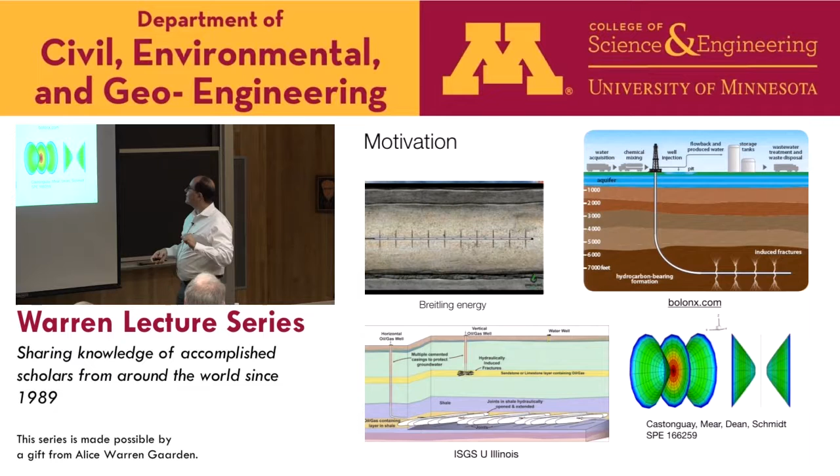And it seems that in science you really have unanswered questions and unquestioned answers. And so this idea that you will naturally have these nice networks of parallel cracks, to me, falls into the second category, to such an extent that it's often also an assumption that is made in lots of models. So this is just one random example of numerical literature where the rotational symmetry was a de facto hypothesis in the computation, because everything is symmetric, therefore we're going to have a symmetric solution, and everything is going to be nice like that.

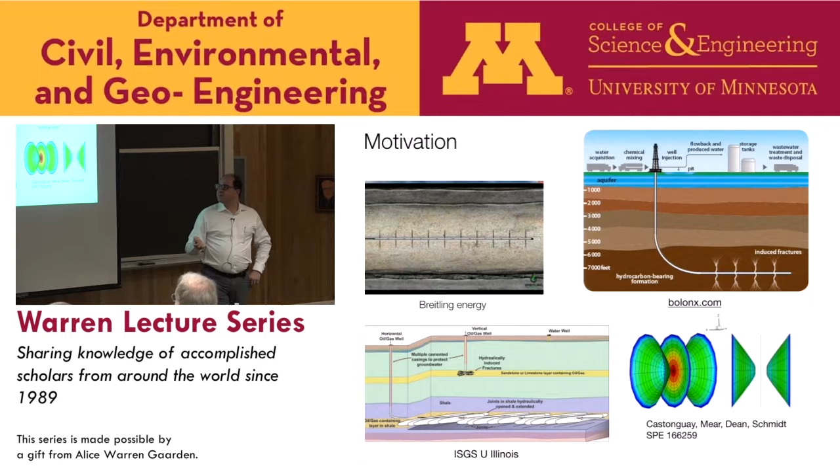On the other hand, in my experience doing fracture mechanics in situations when you have many cracks that interact with each other, we've highlighted several situations in which the interaction between cracks causes loss of symmetry. And so, to me, this picture has always sounded very idealized and maybe closer to wishful thinking than reality.

So, in short, what are we looking at? We're looking at the tightly coupled problem of hydraulic fracturing, so injecting a fluid through a well into a porous reservoir. And so what I want is to develop the model. I want to implement it with as few assumptions as possible, and in particular, as few assumptions as to the geometry of the resulting cracks as possible. And what I'd like to use this for is to study the interaction between stimulated cracks.

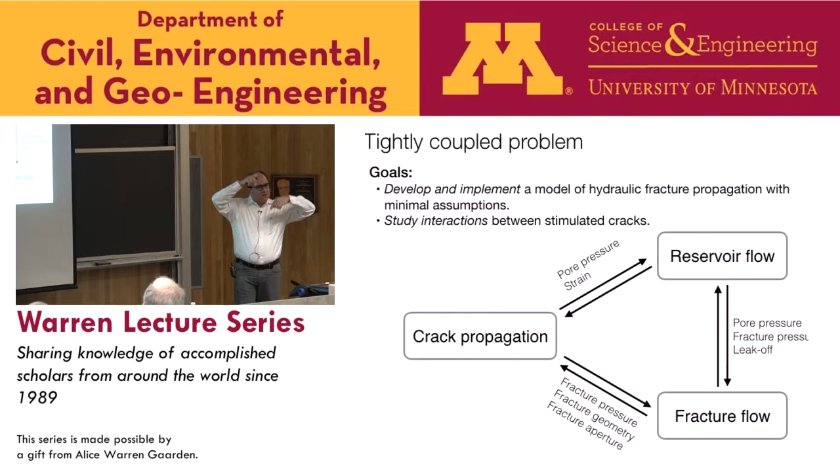So schematically, why is this an interesting problem? Because you really have these three tightly coupled components. You have the flow in the reservoir, you have the flow in the fracture, and the intercommunication between these two is the pore pressure and the fracture pressure, and the balance law, the leak off, so the mass balance between the fracture and the reservoir. You have the crack propagation that interfaces with the reservoir flow, because the pore pressure, of course, affects the crack geometry, but also the strain in the reservoir will have an impact on the reservoir flow.

And the crack propagation, of course, interacts with the fracture flow, because the domain in which the flow in the fracture takes place is a direct consequence of the propagation, but also the aperture of the crack, which is given by the geomechanics, will have an impact on the effective permeability of the fracture system. So you have these three models that we need to couple in a tight manner.

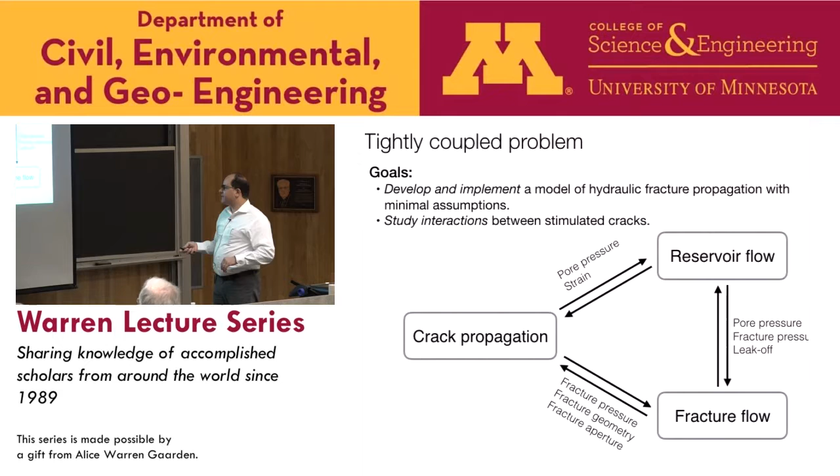Okay. So before I go into the core of the problem, it's also interesting to look at the scale, time, and space involved, because that's what's going to dictate some of the modeling hypotheses. So bear in mind that I'm a mathematician, so I'm not very good with units. So I had to seek help from colleagues in engineering and industry. So I think I got it right.

But so we look at the reservoir, so the scale of the reservoir, or the target zone of interest in the reservoir, would be maybe a few meters to maybe up to a kilometer. And the permeability, so tight oil is 10 to the negative 18. I don't remember the correspondence in millidarcy, but I think this is correct, compared to a more classical reservoir.

When I say time scale, what I mean is if you stop any change in the external condition, how long will it take to reach equilibrium? So typically on a classical reservoir, it's going to be of the order of a few days. As far as I understand, in the shale business, the time to reach back fluid equilibrium could be up to 10 to 50 years. So that would be 100,000 to a billion seconds.

And so I'm not going to try to look at multi-phase transport. I'm only going to assume that you have a single phase or a single fluid in the reservoir. And so at this time scale at which hydraulic fracturing takes place, it seems to make sense to assume that you have a single phase transient Darcy flow.

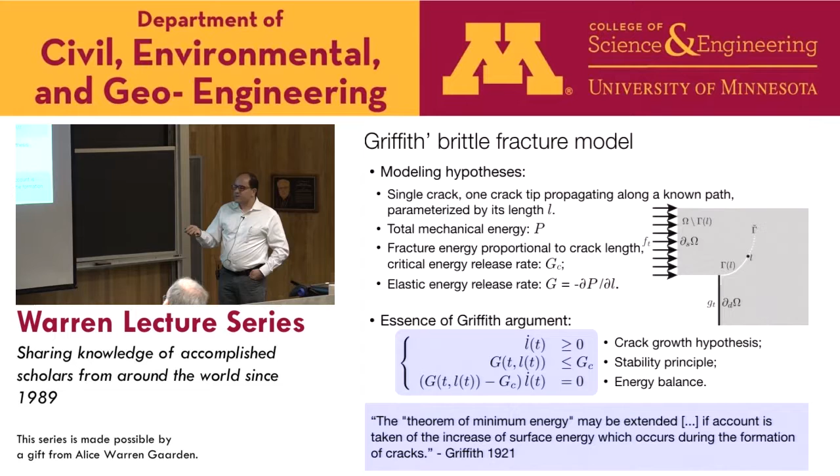However, it seems very simple because if you're familiar with optimization, when you look at these three conditions, these really look like KKT conditions for a constrained minimization problem. So this looks like minimization of P plus GC L under the constraint that L has to be positive. And indeed, if you introduce a total energy, this is your mechanical energy, so it's a sum of the elastic energy computed over the domain minus the crack, because if U is a displacement, the strain is singular along the crack set where the displacement becomes discontinuous. So your total energy is the sum of the mechanical energy in the domain minus the crack plus the work of external forces plus GC times the crack length.

And so one way to see this system of three equations is just as finding a pair displacement and crack length that satisfies the crack growth hypothesis, and that satisfies, so I wrote it as unilateral stationarity, that is, that the derivative of this quantity with respect to L is 0, modulo the crack growth hypothesis, and with respect to U is 0. So derivative with respect to U is just static equilibrium for a given crack length. And derivative with respect to L equals 0, at least positive because of the constraint, is just the stability equation and the energy balance.

So this is just a formal mathematical reinterpretation of this system of three equations. Griffith's crack growth, stability, energy balance is the same as a series of minimizations of this energy with respect to U and L under the constraint that L has to increase with time.

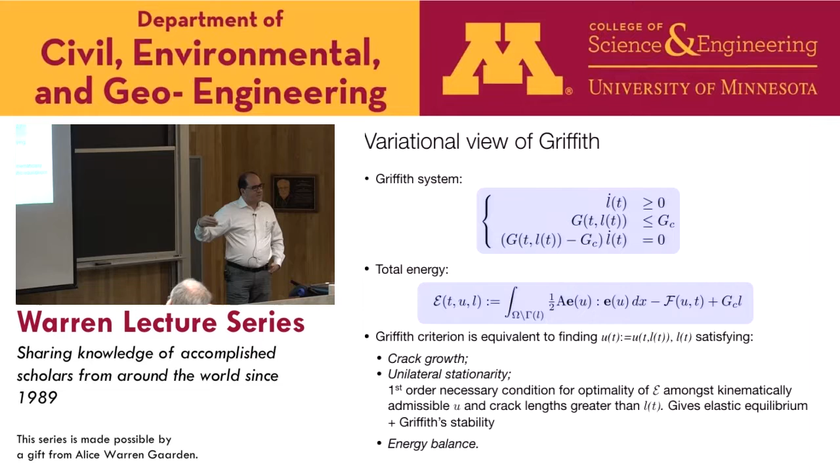Okay. So the next step comes from Gilles Francfort and Jean-Jacques Marigo in France in the late 90s. And what they suggested is that we could make a leap of faith: instead of assuming that your crack path is prescribed and using this energetic argument on a given path, which requires that you have another way to find the crack path, we could actually extend the search scope not only to finding just the length of a crack over a given path, but to finding the crack geometry itself.

So if you go back to this energy, mechanical minus work plus a term that is proportional to the crack length, what they propose is for any time or loading parameter T, any displacement U and any crack geometry gamma that is kinematically compatible with U, to define an energy that is the sum of the mechanical energy away from the crack, plus or minus the work of the external force, plus this term, where H n minus 1 is just mathematical mumbo jumbo for the aggregate length of gamma in 2D and the aggregate surface of gamma in 3D. So it's essentially the same thing as Griffith's energy, but extended to account for any crack geometry instead of just looking at the length of a crack along a known path.

And so they postulated an evolution now, saying that we're going to find U and gamma that satisfy exactly the same problem as before, that is the crack growth, unilateral stability, and energy balance. Okay. Or in other words, that we're going to do successive minimization of this total energy for gamma that contains all previous gammas and all U that are kinematically admissible displacements.

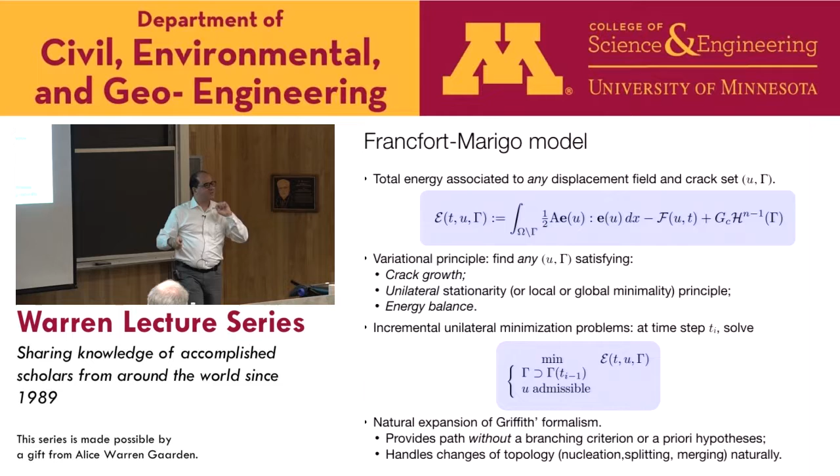In New York, or in any city with a grid plan, if you want to go between 2 points that are not along the grid line, you're going to do that by following this checkerboard pattern. But the length of your path is never the same as the as-the-bird-flies distance, no matter how small your grid is. So you can approximate the location of your optimal path, but you never approximate the length of your optimal path.

So again, the solution of that was independently derived in the math community, in the mechanics community, and the physics community. So being a mathematician, I will present the math version of that. In the math community, Luigi Ambrosio and Vincenzo Tortorelli in the early 90s were interested in an image processing problem called the Mumford-Shah problem. And the structure is very similar to that of the fracture problem. So I took off the work of the external forces just to make the equation a bit more compact. So here you have your variational fracture energy, sum of mechanical energy plus the surface energy.

So what Ambrosio and Tortorelli proposed is to introduce an epsilon, a small regularization parameter, so it has the dimension of a length. To introduce a secondary variable v that will represent in some sense, and I'll try to explain how in a couple of slides, the cracks. And so they introduced two additional functions, s and capital V. So in some sense, think of v as a function that lives between 0 and 1. V equal 1 corresponds to no crack. And transitions from 1 to 0 are where the cracks lie.

So think of a diffuse interface version of fracture mechanics. So S is some kind of a stiffness interpolation. When V is equal to 0, you want your S to be 0. When V is equal to 1, your S is equal to 1, so that in the region where V is equal to 1, this term is exactly the same as that.

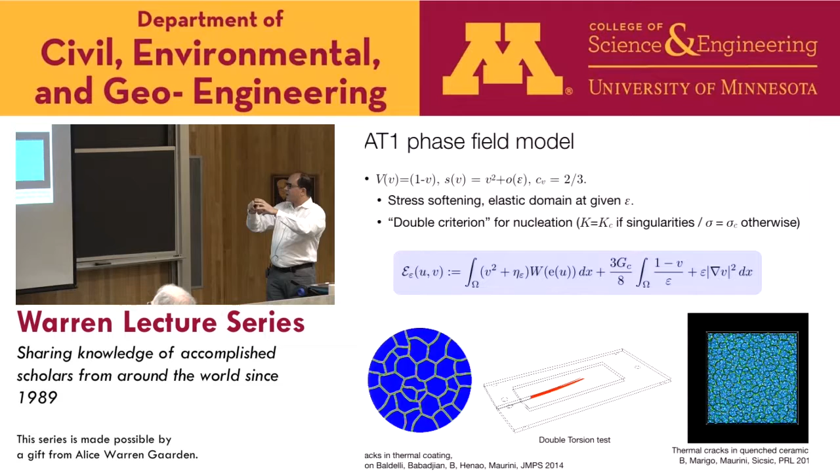This one is very hard to read on such small scale, but it's a propagation of thermal cracks in a ceramic. So think of a block of heated ceramic that you quench, or you put on the cold surface, and so you have this cold front that propagates. It creates tensile stresses and it creates cracks. And so here you're sitting inside your material and you're watching the crack front coming towards you. But you see the potential of this approach to see this very complicated crack pattern and the nucleation of all these cracks and the coarsening phenomenon that leads to larger and larger cells coming towards you.

Okay. So what we want to do now is apply this formalism to a Biot poroelasticity system, recover some concept of crack location from the V field, use the V field to formulate the coupled flow in the reservoir, flow in the fracture problem, couple them, and then get some science. So we're almost done, technically. So first is how do we do the poroelastic medium? We're going to assume that we're in a drained poroelastic regime.

And then there is lots of discussion as to what your stiffness interpolation should look like, what your S of V should look like. So our approach is to assume that you can think of V in some sense as a damage variable. And the mechanics community very much thinks of 1 minus V as some kind of thermodynamic damage variable. So our belief is that we should look at damage taking place at the sub-pore scale.

The reason for that is that we would very much like to be able to simulate the fact that you can create a crack just by increasing the pore pressure, essentially destroying or at least causing distributed damage by just increasing the pore pressure in your material. So that means that we want to apply the V field not to the effective stress, but to the Cauchy stress. So that leads to this somewhat unusual form of the dissipation potential.

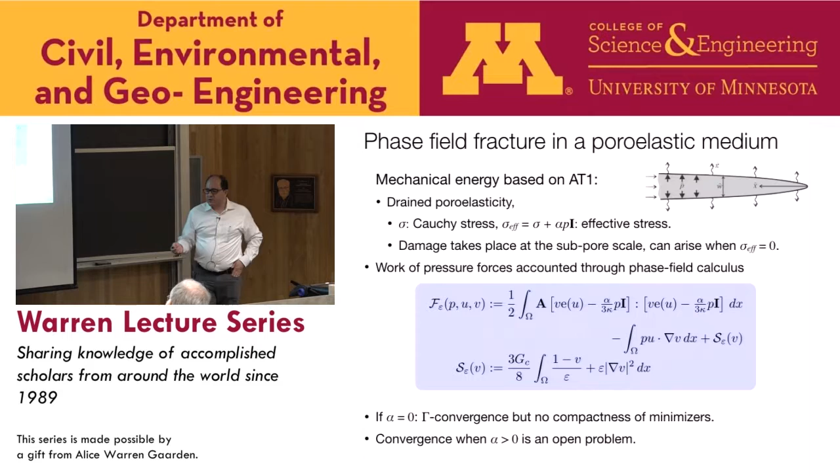And as a matter of fact, at least in the case where alpha is equal to 0, we can still show the gamma convergence. We cannot show the compactness of minimizers. It looks very technical, but it has a very strong implication. It means that we cannot show that the minimizer of this energy converges to the minimizer of the variational fracture energy. And we'll see why it will really hit us in the next slide or two. In the general case, we don't know how to do the convergence, at least the math community has not looked at that closely enough.

Okay, so I'm going to try to do a little bit of verification. I'm going to apply that to the Sneddon problem. The Sneddon problem: we're looking at a single crack that is filled with a liquid with no viscosity. We assume that there's no leak-off, there's no pore pressure. So really, the fluid flow is defined by one parameter, that is the pressure.

It's a nice problem because you can solve it in closed form, and you can see that if you look at just a line crack in 2D in an infinite medium, if you look at the pressure increment, then nothing happens until a critical pressure. And at this critical pressure, the problem becomes unstable in the sense of Griffith, that you cannot control the crack tip location. Your crack tip shoots to infinity. So it's not very interesting.

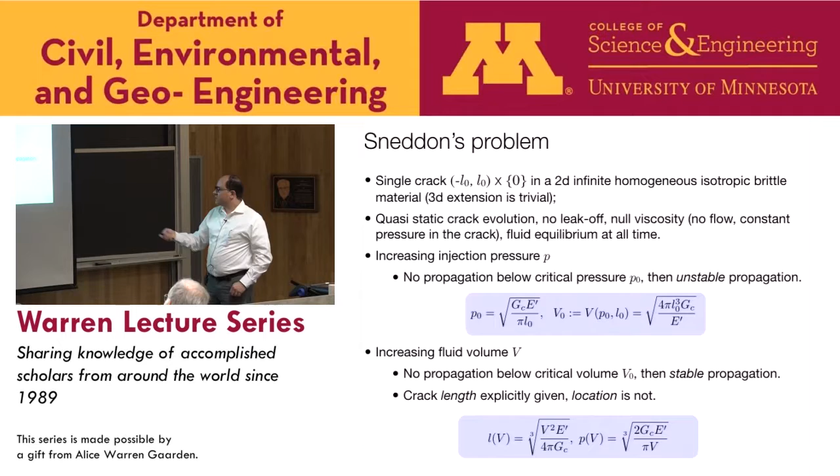If you look at the dual problem, that is minimizing with respect to the total fluid volume in the fracture, what you get is that until the volume reaches the critical volume associated to the critical pressure, nothing happens. And then you have a stable propagation. You can compute the length of the crack and the pressure in the crack through this expression that's well known. And so these are two computations. This is the crack pressure and the crack length as a function of the injected volume.

The dashed line is the closed form solution, the Sneddon solution. These series of lines correspond to various values of the regularization length. And what you observe is when the regularization length becomes smaller, you get closer and closer to Sneddon's closed form solution. If it becomes small compared to the mesh size, here the mesh is fixed, then you tend to overshoot on your pressure. So at least we know how h and epsilon should relate, and we have good faith that both coincide.

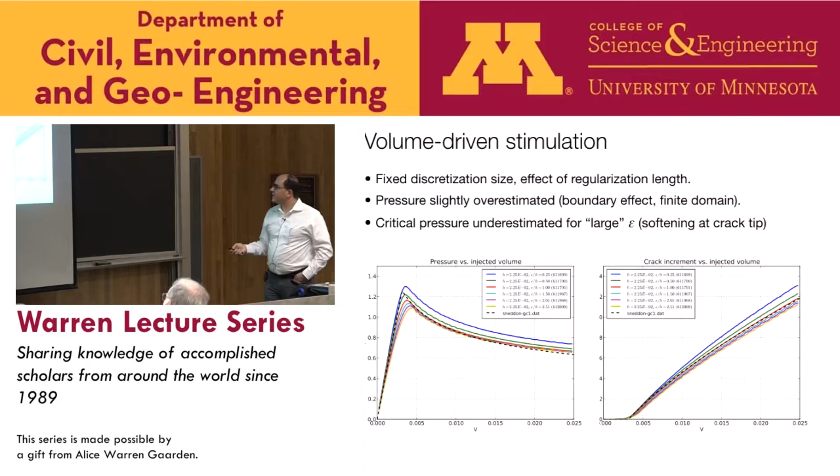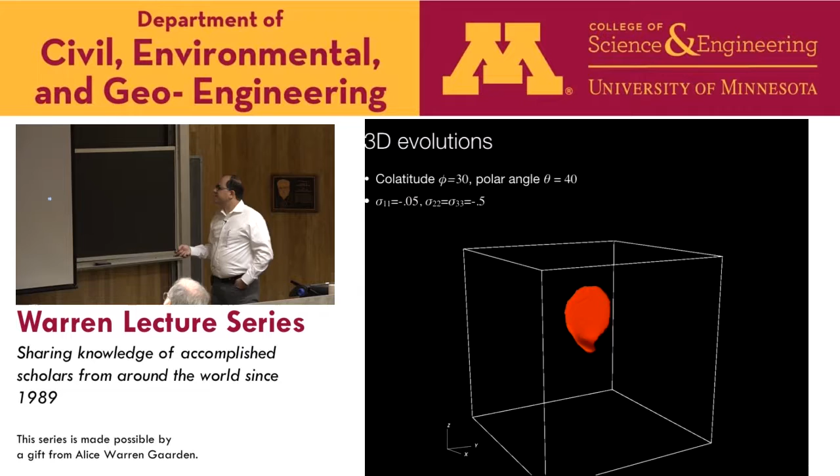So okay, it's an application to two stimulated cracks. It's just to show you that indeed we can recover crack paths. Indeed we can do merging, at least from the mechanics standpoint with this setting. I'll skip the 3D geometry. You can apply exactly the same formalism in 3D. You can get interesting fracture patterns. And instead, I'll go now to coupling with the phase field.

Let's look at the flow problem. Really, we have two problems. We have transient Darcy flow in a reservoir, and we have a steady state Reynolds-Poiseuille flow in the fracture. So the problem is driven by the mass balance, Darcy law, the boundary condition on the boundary of the reservoir. In the fracture, your mass balance, your Poiseuille law, and so the important quantity is the crack aperture, the normal jump of the displacement.

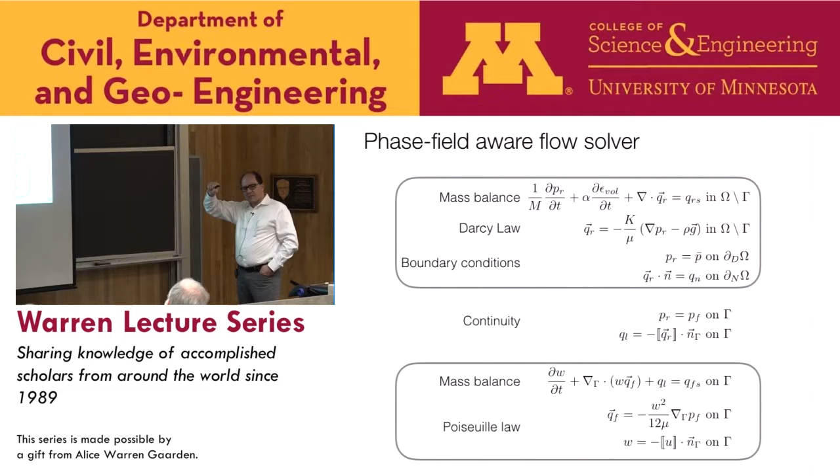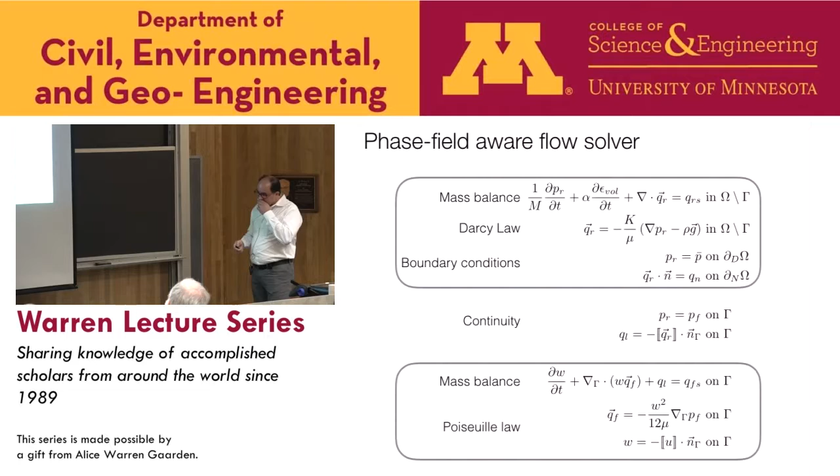And these two problems are coupled by the continuity of the pressure and of the leak-off of the flow from the reservoir into the fracture. So I think it's fairly classical that one way you can couple these two problems, you can just write them in weak form.

You take the proper finite element shape function, and you can get a weak form like that, where you have some equations that are on the reservoir minus the crack, and some equations that are on the crack. And of course, again, because we don't have the crack in the phase field problem, we don't have an explicit representation of gamma, we need to find a way to compute this integral.

And so this takes a little bit of work, and you use what we loosely call phase field calculus. This part is easy. So we want to integrate away from the crack. We know that the cracks are the zone where v is not 1, where v goes to 0. So we just multiply it by v squared. So here we're done, and we've recovered our integrals away from the crack.

For this, again, you try to see how you can recover surface integral from the shape of v. The v field is something that is not 1 near the crack, or the gradient is also concentrated near the crack. So by just hitting this term by, for instance, modulus of gradient v, or 1 minus v over epsilon, that would be about the same thing, you would get the integral. You can convert this surface integral into a volume integral.

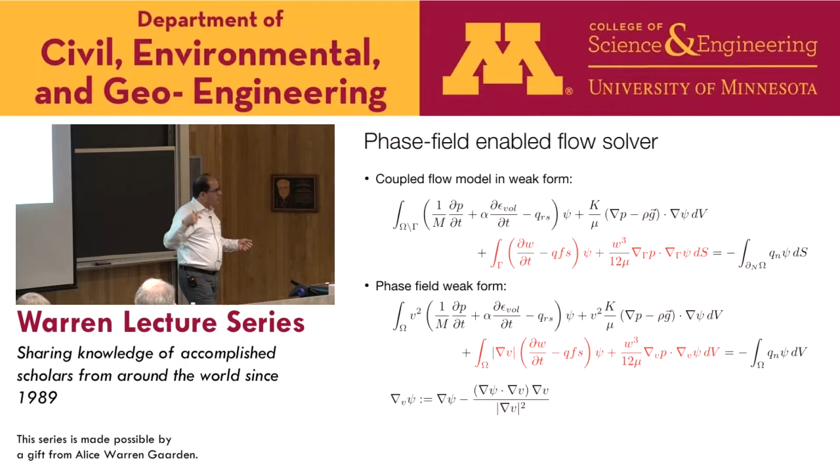Okay, so a few words on the implementation. For several reasons, we started by looking at how we could do just an iterative coupling of a mechanical solver and a flow solver. And it's a natural thing to do because maybe you have an existing flow solver and what you want to do is just modify it a little bit to make it aware of this phase field and then try to couple your two codes. So that would be the equivalent of the fixed stress coupling.

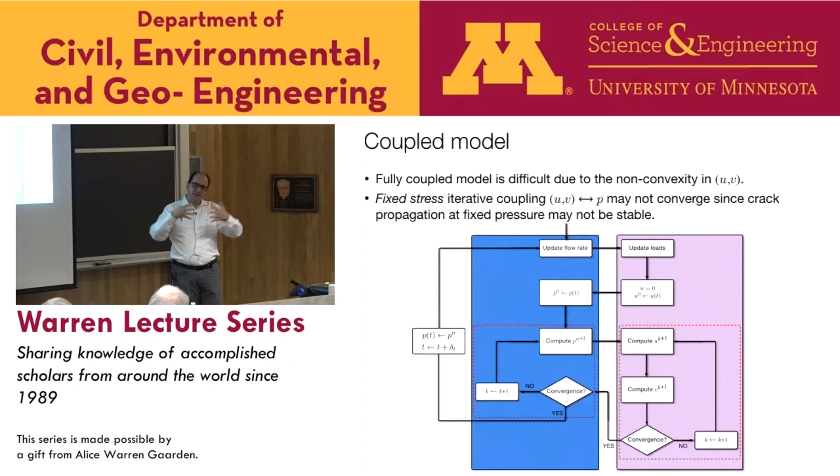If you're familiar with poroelasticity, it's very common, if you don't want to do a tight coupling, to do an iterative coupling where you compute the deformation, you get the stress in the reservoir. You plug that into the flow problem, you solve for the pressure, and you iterate back and forth, and you can show that this converges. So it seems like a very natural idea to do that. And indeed, many groups that try to do phase field coupled modeling use this type of coupling. It has just one caveat: it does not work.

And the reason is actually why I presented the Sneddon problem. Of course it does not work, because we know that if we fix the pressure, even in this really simple problem of the Sneddon crack, you compute a fracture pressure, and then you try to compute the equilibrium displacement plus crack. There is no such thing as the displacement plus fracture equilibrium.

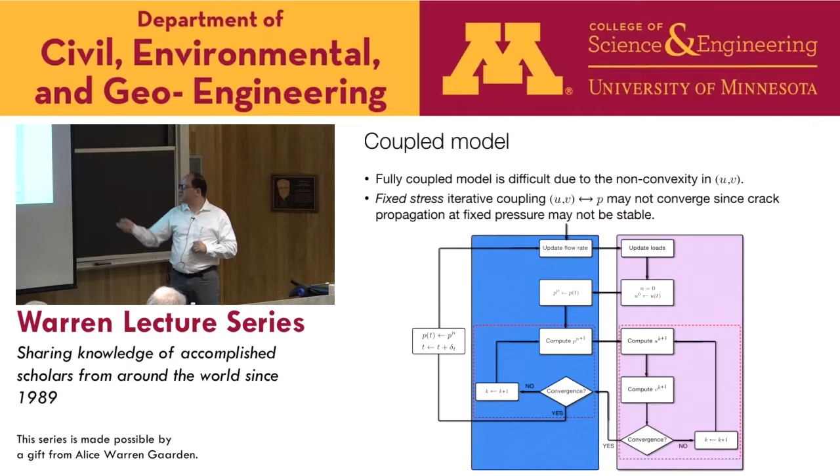So formally, if you want to prove convergence of an iterative coupling, you need some kind of a contraction map. You need to show that a small change in pressure leads to a small change in displacement, and a small change in displacement leads to a small change in fracture, so there is a chance that it converges. Here, this is not the case. A small change in pressure can lead to a very large change in displacement plus crack. So there is no way this type of coupling is going to work. It only works if you don't, for instance, compute exactly the displacement and the crack, or you have to do a lot of fudging around.

So instead, what we looked at is to go back to the idea of a fixed stress coupling. So we're going to iterate computing the displacement and the pressure until convergence. That we know works. It's the classical stress coupling. So we fix the reservoir configuration, we fix the phase field, we iterate U and P until convergence. We know that this problem is well posed.

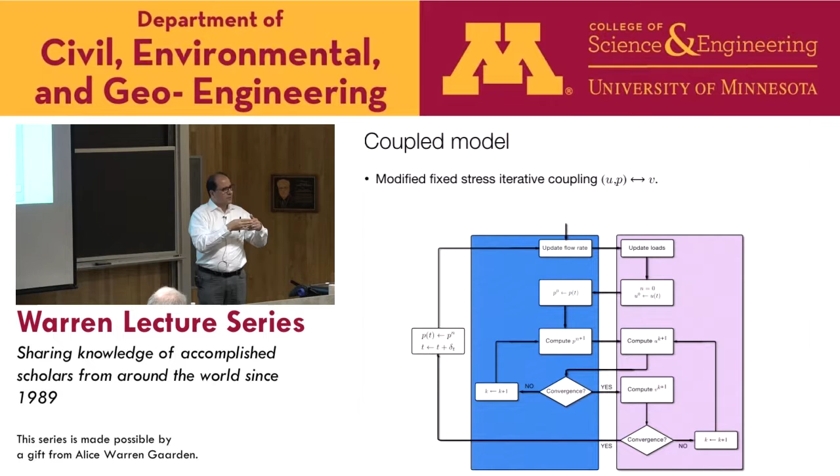Once we have the fluid and mechanical equilibrium, we use this information to update the phase field, and we iterate this. And although we have not been able to formally prove convergence of this scheme, it turns out to be very robust, and we never had a problem of divergence of this pumping problem, where at one step your crack becomes very large and then your pressure drops, so at the next step the crack has to shrink and so on. So this is very robust.

Okay. So I'm going to try to do some verification, and for that I want to see where I can apply this formalism. So this is the classical parameter space from Emmanuel. Emmanuel, you told me that it actually predates 2002. So I'm a bit late. So you define a dimensionless toughness and a dimensionless leak-off coefficient, and you have these four regimes. To the left is when the viscosity dominates the problem. The toughness has essentially no influence on the flow.

This is something that is very challenging for us because all the representation of the fracture system comes from the mechanics, comes from solving the Griffith problem. So if you tell me that in Griffith fracture mechanics the toughness has no impact on the geometry of the reservoir, I don't know how to recover my phase field. So this edge is definitely something we cannot do.

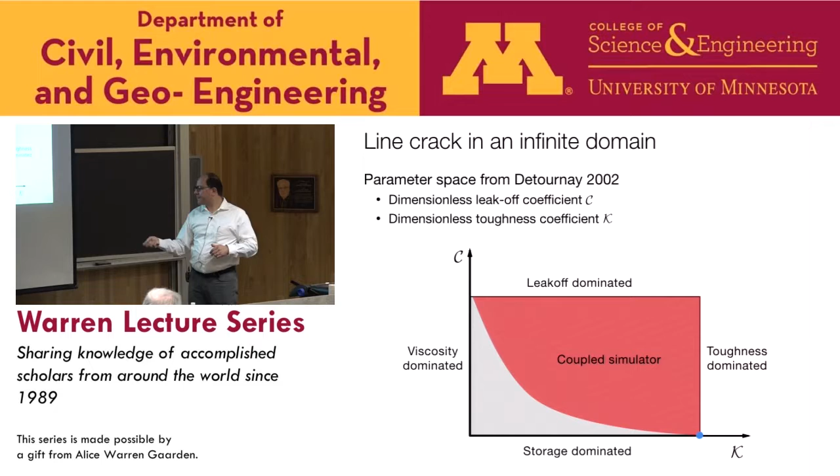The storage-dominated part, that's the situation where, for instance, the permeability of the reservoir is essentially zero, is quite challenging because we put a lot of work into trying to replace the flow in only the fracture with a flow in the entire reservoir. So in this regime, we actually have a problem where the equations of the fluid are not defined in most of the domain. Maybe we could fix that, but you know. So this is more or less the range of what we can simulate.

This blue dot is the Sneddon problem, the situation where it's both toughness and storage dominated. That's where we have an easy closed form solution. So what we're going to do, we're going to try to see how close we can get to Sneddon while still remaining in the red zone.

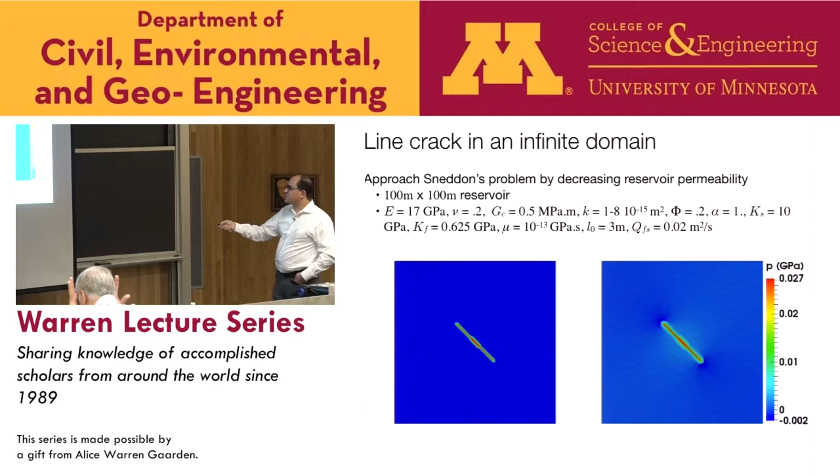So this is an example of a computation. Here you have the crack, so the phase field representation of the crack, and here you have the pressure representation. The color map is not very well chosen, but you see that there is a leak off. You see the pressure decreasing away from the crack tip. And you see that the crack grows.

If you qualitatively compare that to Sneddon solution, well, you can't really, because Chukwudi didn't put the Sneddon solution. So you have to trust my word that when the permeability of the reservoir decreases, that is when you go this way, you get closer and closer to the closed form solution of Sneddon.

And here what we're looking at is the volume in the fracture system as a function of time. And again, when the permeability goes to 0, you see that the leak off decreases, so most of the fluid remains in the fracture system. So you get closer and closer to the total injected volume.

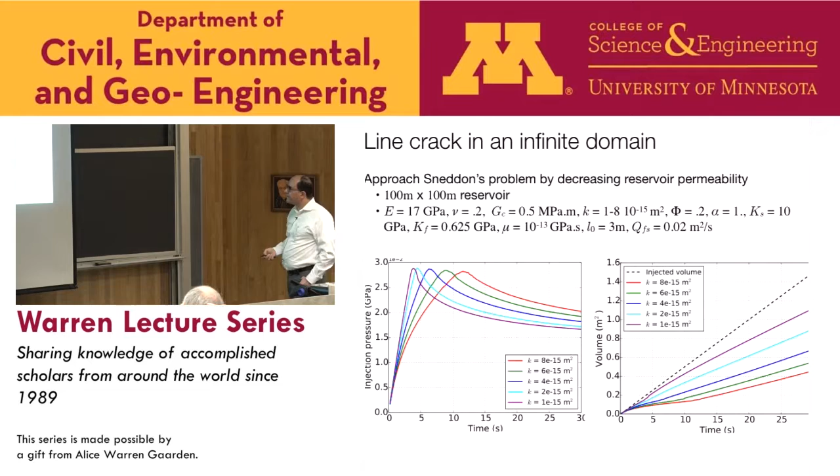Okay, you can do things like a well shut-in. So you inject, you propagate a crack, then you turn off your injection. I think the oil people call that a mini frac problem. They use that to measure toughness and permeability at the same time.

Okay, I don't have much time to go through that, but we can look at heterogeneities in the toughness, the permeability, the Young modulus, and we can really see how you can either constrain a crack to remain in between two layers or have it escape your layer.

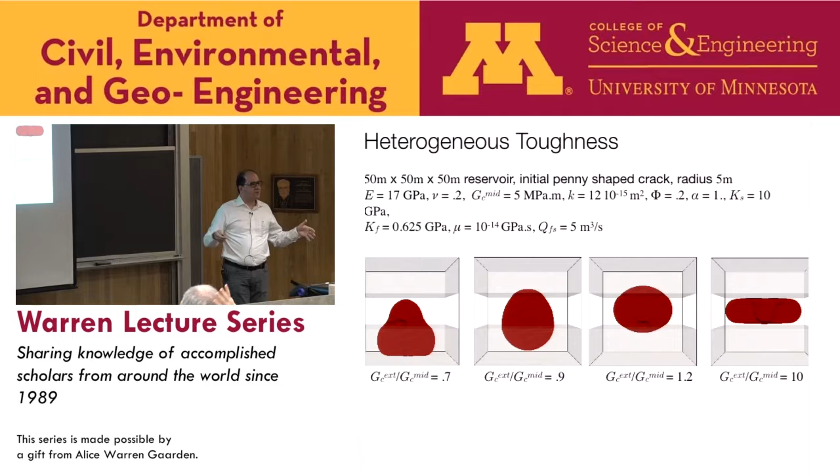But what we see is interesting is that numerically we observe loss of uniqueness. There are situations where you have two energetically equivalent solutions, one where your crack would go up and one where your crack would go down. Somehow the code picks one over the other, but they're exactly the same. So the fact that the problem is symmetric does not guarantee that the solution is symmetric. It only guarantees that the set of possible solutions is symmetric, but there may be non-symmetric realizations in this symmetric set of solutions.

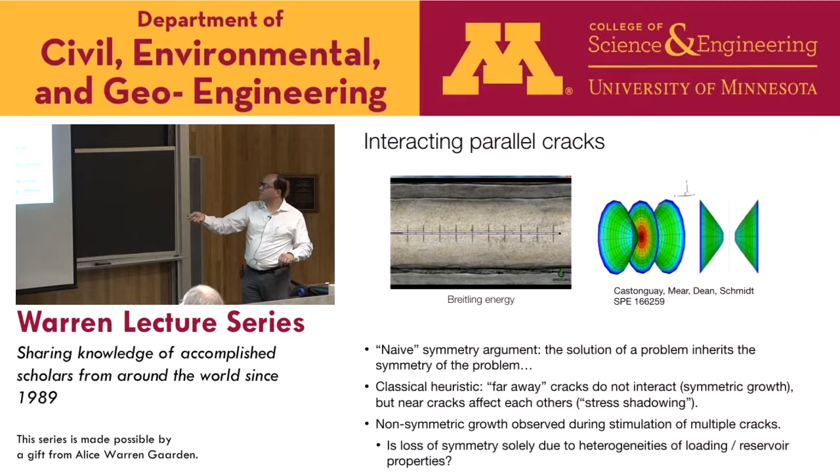And that brings me quickly to the interacting set of parallel cracks. So what we want to look at is a situation when you stimulate many cracks, and we would like to reproduce this nice brochure that was sold by somebody. And when we do the computation, here is what we got.

So when Chukwudi got that, he was really worried that he had done something absolutely wrong, that his code was buggy and he would never graduate. Because obviously this is a perfectly symmetric problem, and therefore the solution should be symmetric, but his computation does not lead to that. So what we tried to do.

So first he looked at just two cracks, changing the spacing of the cracks and changing the reservoir permeability. When the cracks are very far away, they don't interact, and they're nice and straight. But as soon as they start interacting, either only one of them grows, or instead of having this nice pattern of two parabolic cracks that go away from each other to minimize the effect of stress shadowing, we see these non-symmetric patterns.

Okay, this is an example. And clearly here the cracks see each other through the leak off, or if they're very close, they see each other through the stress shadowing. So we went back to the Sneddon problem and we tried to see, is there something really deep in there, or is it just happenstance, or is it just that your program is incorrect?

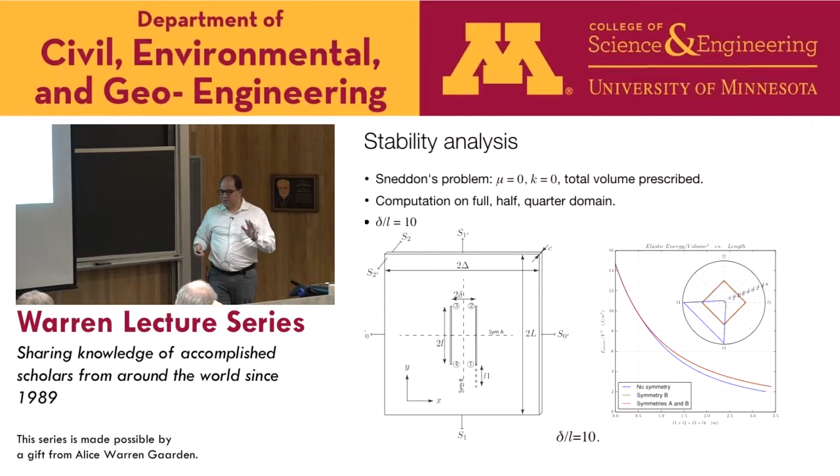Okay, so I'll finish by just saying: what I was able to do is to build a phase field enabled fracture solver. The important thing to remember is you need to do a modified fixed stress iterative coupling. You need to do some work to compute the crack aperture and to make sure that your computation is valid all the way to the crack tip. That loss of symmetry is not necessarily induced by material heterogeneities or boundary or injection heterogeneity, but it's actually a deep fundamental problem for interacting cracks.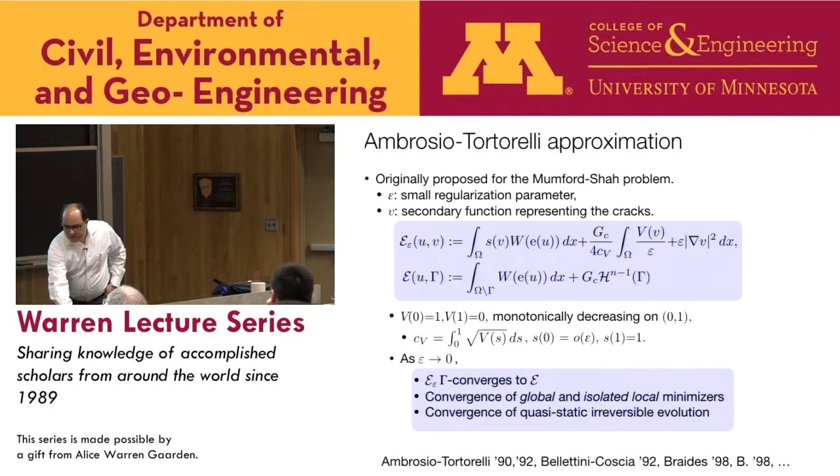Actually, let me show you the next slide, it's actually the one with the answer to the question. Epsilon. Yes, epsilon. I'm sorry. Epsilon changes from 0 to 1. Is this small? No. V is the phase field function, it goes between 0 and 1. Epsilon is the length; this length is proportional to epsilon. So small can take many meanings. The mathematical community is not interested in what happens for a given epsilon. All they show is the limit when epsilon goes to 0. Now, there's been a lot of work in the mechanics community to understand what these models mean when epsilon is a given parameter.

And what we see, and I didn't have time to go through that, is really these type of models behave like a dual criterion fracture model. So the nucleation is driven by K1 equals K1c, for instance, if you have a singularity. So it's always Griffith, no matter what the value of epsilon is. But if you look at the problem without singularity, you can still nucleate a crack, and the critical stress at which you nucleate your crack depends on epsilon. And we have an explicit formula.

So small from the math community means when epsilon becomes arbitrarily small, we converge to a Griffith model. Small from the mechanics community means that epsilon in some sense is related to the defect size in your material and is related to the yield stress in your material. So there is actually a way to estimate epsilon. And we have to do that if we want to nail nucleation away from singularities properly.

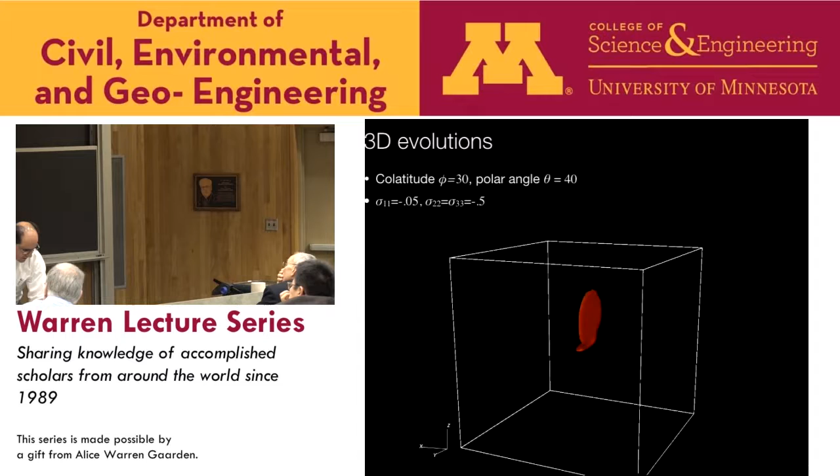Well, so for instance, in the experiments, when we look at far away interacting cracks, where are these? So for instance, here we really make sure that the spacing of the crack is large compared to the value of epsilon. Epsilon is essentially the thickness of this zone. As long as the thickness of this zone is small compared to any pattern in the domain, the spacing of the crack from the edges of the domain, or the spacing of the cracks themselves, the value of epsilon has essentially no impact on the propagation in the Griffith mode.

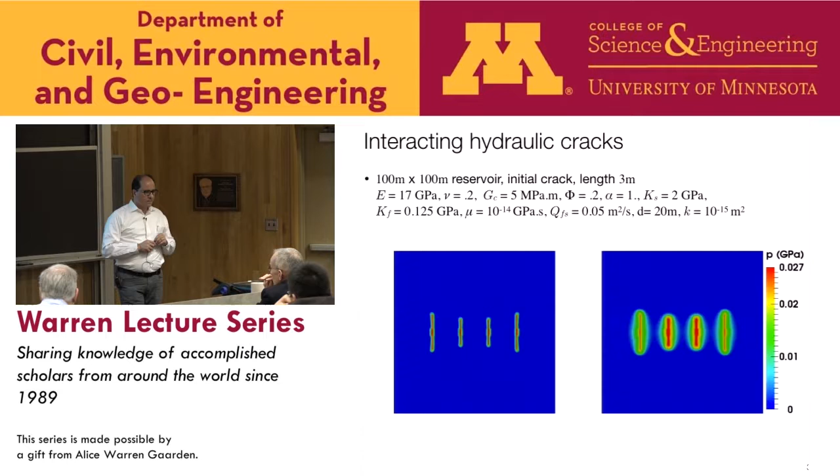We can show that on this crack, we really satisfy K1 equal K1c globally, no matter what epsilon is, as long as epsilon is not of the order of the size of the domain or some patterns in the domain. So you do have a lot of freedom in the choice of epsilon. How about if I want to simulate the spacing of the crack, which is not given to you? Initial crack or when they grow? No, from the medium I want to simulate the spacing of the crack, which may be comparable to epsilon. In that case, how big is the influence of epsilon on the results?

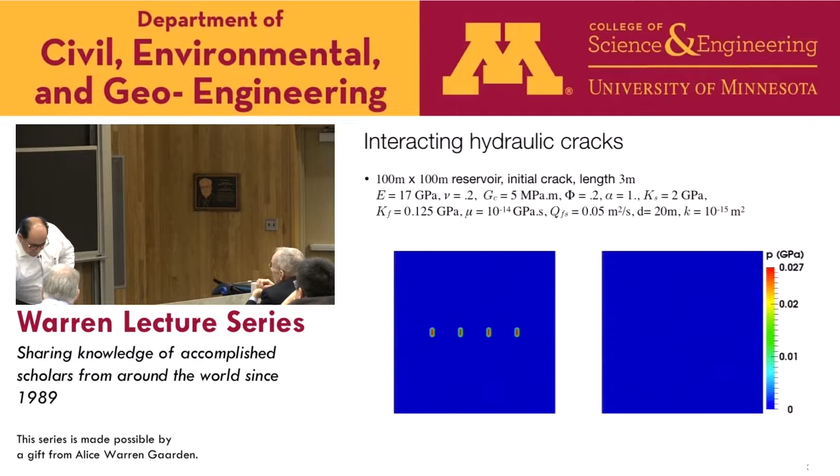We plugged the epsilon into this 3D computation. We found the crack pattern, and I don't show it here, but we were able to do quantitative comparison between crack spacing and numerical simulation for this problem, and we really nailed the answer over 4 orders of magnitude of the crack length. Right, thanks.